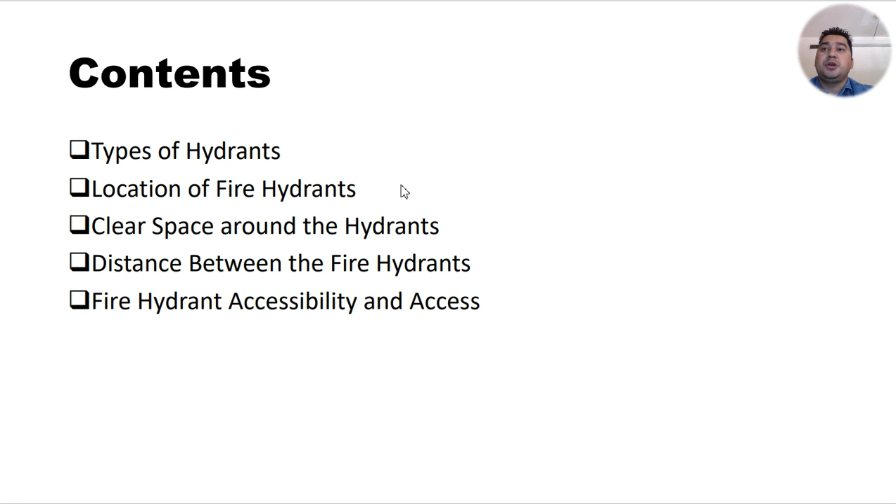Types of fire hydrants, location of fire hydrants, the clear space required around the hydrants, distance between the fire hydrants, and fire hydrant accessibility and access. These are the topics I'm going to discuss today. Now the types of fire hydrants. How many types of fire hydrants are there? First of all, we have the dry hydrants, and we have the wet hydrants, wet barrel and dry barrel.

According to NFPA 1142, Standard on Water Supplies for Suburban and Rural Firefighting, a dry hydrant is an arrangement of pipe permanently connected to a water source other than a piped, pressurized water supply system that provides a ready means of water supply for firefighting purposes and that utilizes the drafting suction capability of a fire department pump. That is the purpose of a dry fire hydrant.

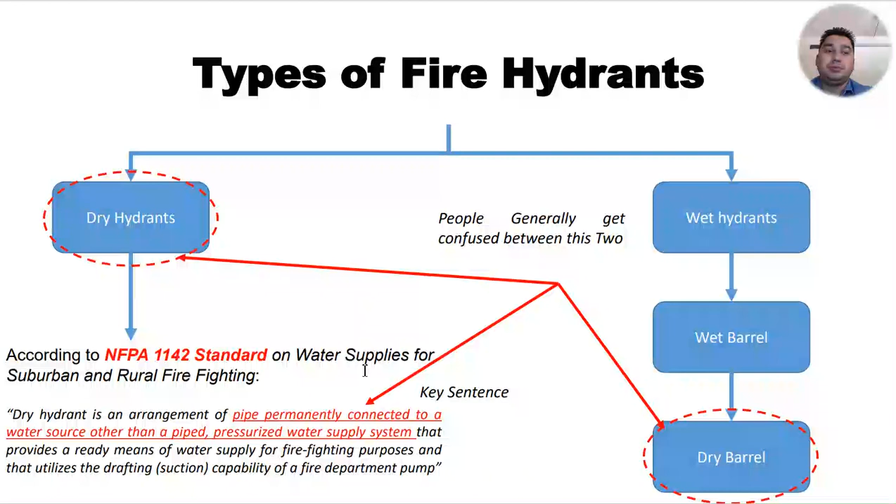People generally get confused between these two, so we should not get confused after this training. We should have a clear understanding of the different fire hydrants. Dry fire hydrants, let's discuss this one. What is a dry fire hydrant? A temporary hard sleeve connection from the fire engine pump intake to the dry hydrant. So this is the temporary connection. And a permanently installed dry hydrant pipe.

There is the frost line. There is the dry line. Water source such as a lake. This is the lake below the drought line, and this is the strainer. In a dry hydrant, water has to be drawn from a supply like a lake, pond, or reservoir tank by a fire pumper through a pipe. It is typically located underground. So in dry fire hydrants there will be no water. You have to get the water from the lakes or ponds. That's why we call it a dry fire hydrant. I hope this is clear now.

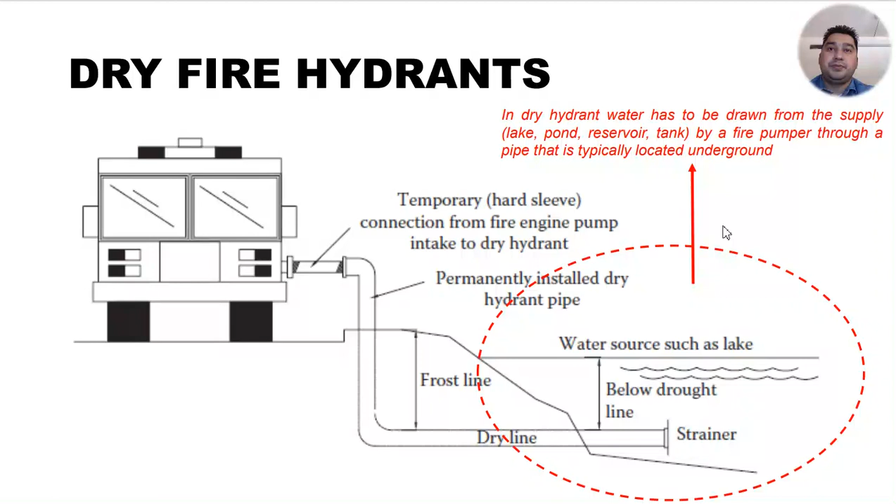Now the wet fire hydrants. In wet fire hydrants, there will be water in the pipe. These are two different wet fire hydrants. We'll discuss the first one first. This is the stem. Let's start from here. This is the piped water, buried below the frost line. The dry barrel fire hydrant: the available water is held behind the valve. So the available water is held here, behind the valve.

And this is the stem, and this is the outlet where the water will come out. And a stem operating nut. This is the stem operating nut. The water will come out from here. The fire department team has to join the pipe over here. The second one has a minimum depth to avoid mechanical damage. There is a minimum depth we have to follow.

There is the water. Wet barrel fire hydrant, and the stem: water is available up to the outlet. For this one, the water is available up to the outlet here. For the one before, it was here. So this is the difference. The water is available up to here. This is the outlet, and the water will come out from here.

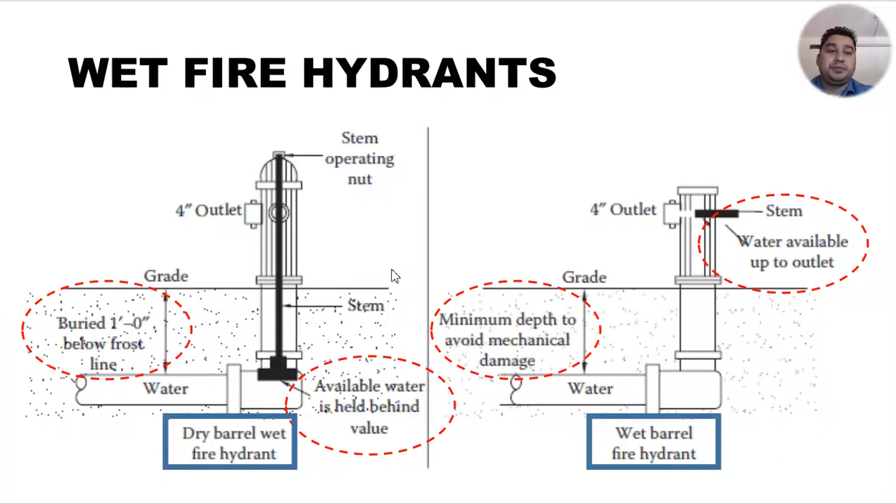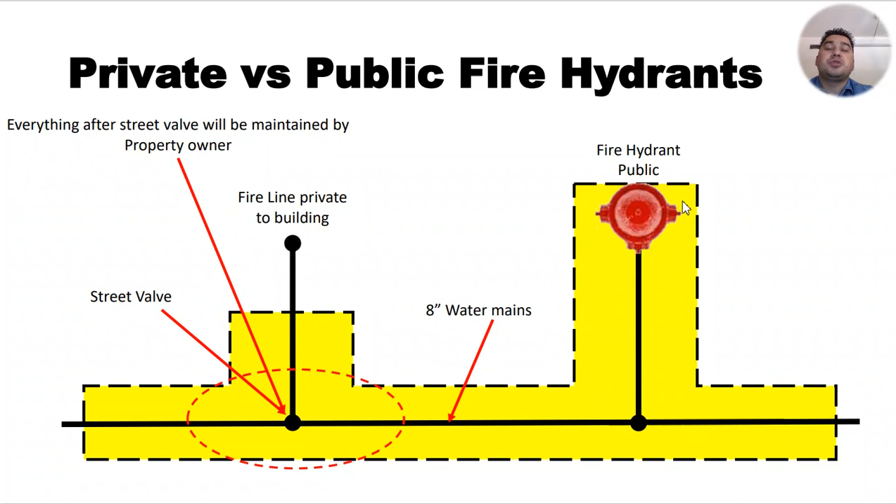Private versus public fire hydrant. Everything after the street valve will be maintained by the property owner. So if the fire hydrant is not public, not on the street, then it is a private one, and it should be maintained by the owner of the building or the place. This is the street valve, and the fire line is private to the building. So this is the private one. The water mains will be here, and the public fire hydrant. This is the private, and this is the public fire hydrant.

Now, location of fire hydrants. What should the location be, and how can we make sure the location is proper? 36 inches of clear space must be maintained around the hydrant, with no obstruction. Minimum 457 millimeters, max 914 millimeters from the ground. The bottom of the safety flange should be at least 2.5 inches above the grade where it is set.

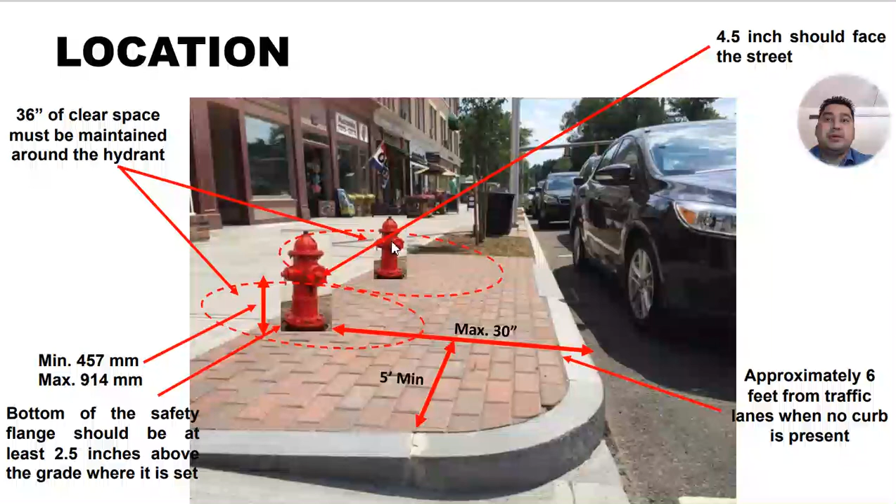Minimum 5 feet, and max 30. Approximately 6 feet from traffic lanes when no curb is present, so approximately a 6 feet gap should be maintained from the traffic. And the 4.5 inch outlet should face the street.

Now the location. It should not be like this. There should not be any parking near fire hydrants. No parking within 15 feet of a fire hydrant, marked by signage and painting. Wherever there is a fire hydrant, the area should be clearly marked with no parking, and people should not be allowed to park vehicles there. Otherwise, this type of situation will come up.

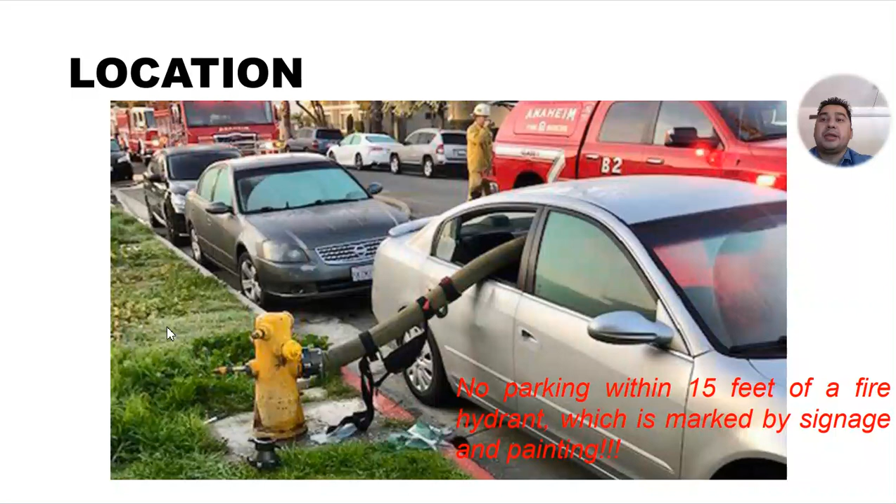So the fire hydrant must be placed at least 40 feet from the building it serves. So the distance from the building should be maintained 40 feet away to make sure that you can use that fire hydrant properly without any obstructions, without any other hindrance. Avoid placing it in the collapse zone perpendicular to the walls, and at least 40 feet from the building it serves and the public street. That is the distance we have to maintain from the building.

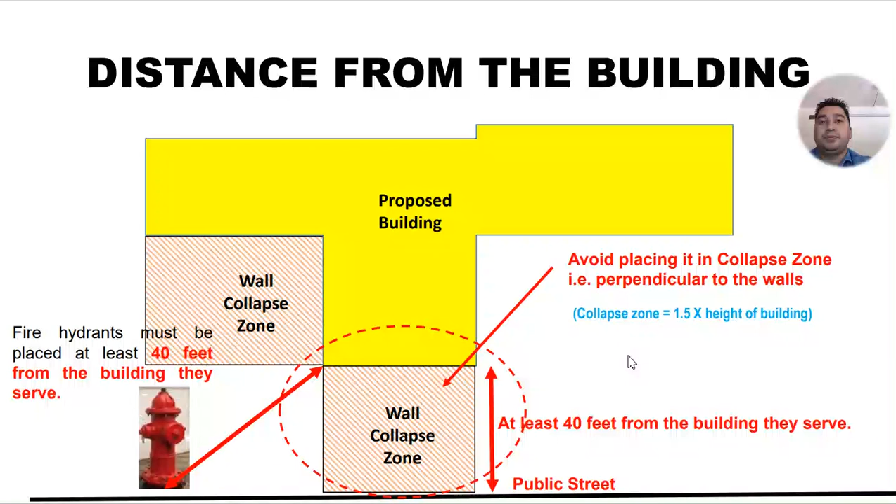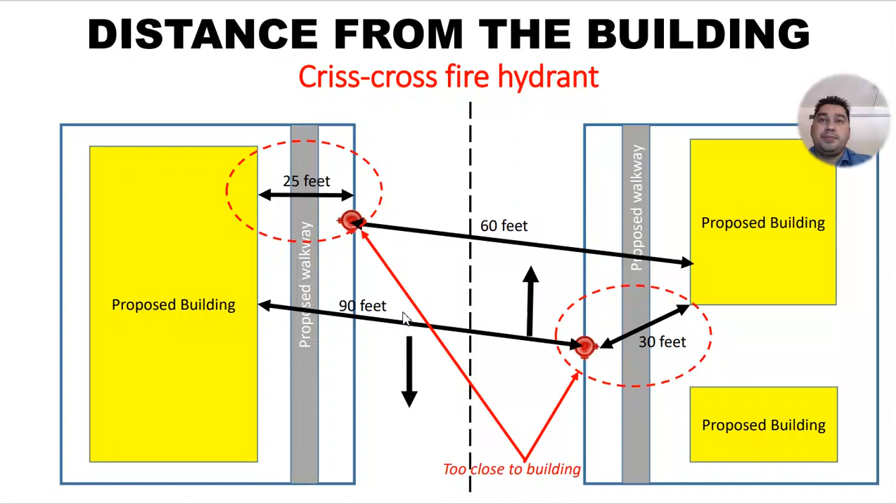Now, distance between the fire hydrants. What distance do we have to maintain between hydrants? First of all, we have to check the type of the building, the purpose of the building where we're going to use the fire hydrants. The maximum distance between hydrants that we have to maintain is in feet.

Industrial buildings and warehouses, the maximum distance should be 250 feet. Schools, daycare centers, it should be 300 feet. Offices, commercial establishments, churches, hospitals, and nursing homes, it should be 350 feet. Apartments, multifamily dwellings, townhouses, the distance should be 350 feet maximum. Single family dwellings, it should be 500 feet.

Now, what exactly these distances mean. These measurements indicate what one fire hydrant can cover along the fire access road depending on building type, fire load, and number of fire streams required. So this distance means what the fire hydrant can cover. That is the distance we are showing here.

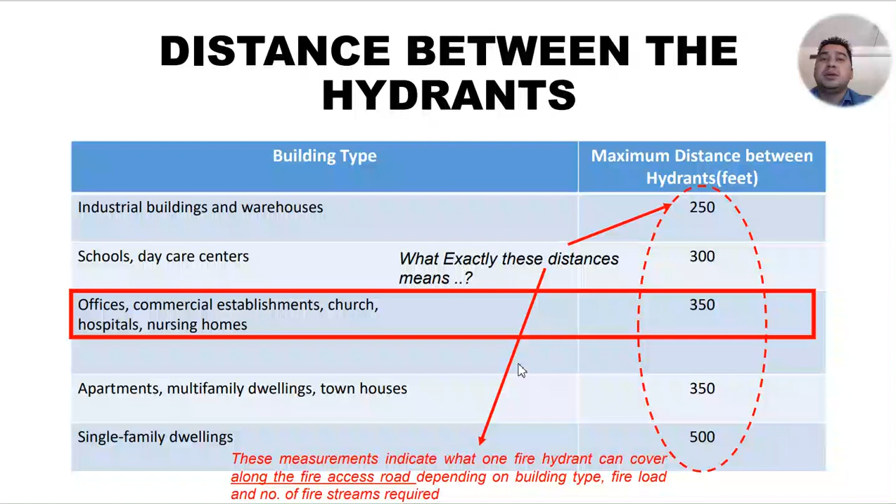Fire hydrant coverage. What can a fire hydrant cover? So this is the proposed building within 150 feet. IIB, B, 2-story, 40 height, not sprinklered. So this is the fire hydrant, and this is the firefighting vehicle here. Okay, and it is connected to the one fire hydrant, up to 350 feet max coverage along the required vehicle path.

Fire trucks connect supply hoses to fire hydrants, so the distance is based on how far the truck can travel from a fire hydrant by connecting the hose on the fire hydrant. Path 1, this is path 1. 350 max coverage along the required vehicle path. So 350 is the max they can cover, but it is within 150. And from here, it is also 150.

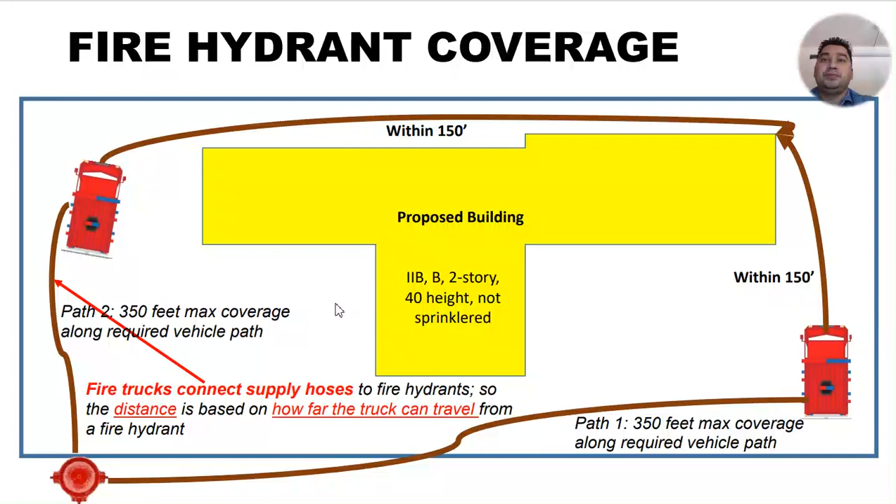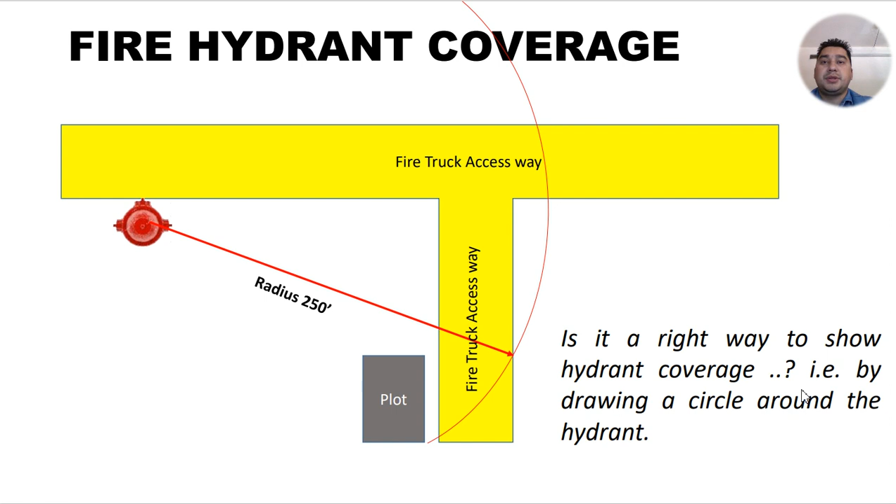Now, fire hydrant coverage. This is the fire truck access way. And this is the fire hydrant. Radius is 250. And this is the plot. Is it the right way to show hydrant coverage by drawing a circle around the hydrant? So this is not the right way.

The fire hydrant coverage, path of truck travel with hose lay. So this is the path the truck will travel with the hose. And this is the plot. Coverage is not met if we consider circular coverage around the hydrant. So around the hydrant, we should not use the circle, because we can't cover the entire area. We need to check coverage by laying hose along the truck access path, considering all possible obstructions.

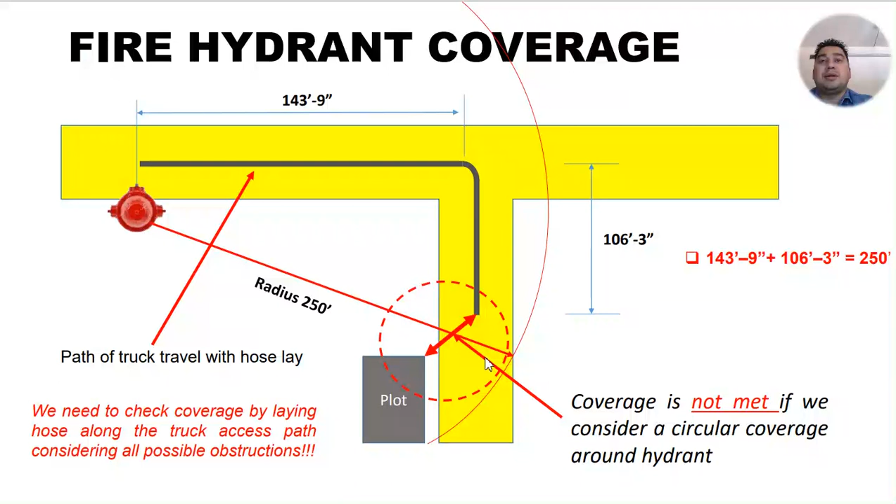So when you are checking whether these fire hydrants can cover the area or not, you have to connect the fire hose to the fire hydrant, and you have to go along with the truck to make sure that they are covering the possible paths and not getting any obstructions around the path. So that's all from my side regarding the fire hydrants.